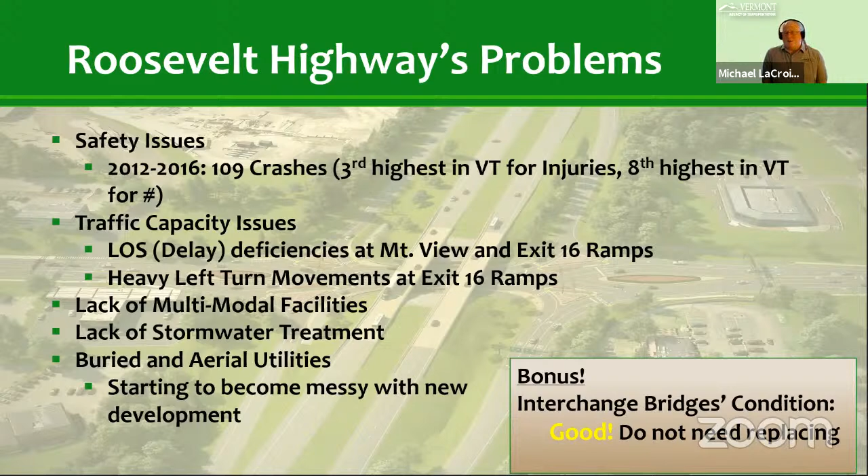Additionally, the corridor has no stormwater treatment facilities, and that's something the agency looks at when we're programming and improving new projects. And there's a significant amount of buried and aerial utilities up and down this corridor, primarily due to the growth of development in the Water Tower Hill area. One of the non-issues with the interchange at exit 16 is the fact that the interchange bridges are still in a relatively good condition, and that will factor into what we scoped to solve these issues in a moment. So really, we're going to address pretty much everything that I just spoke about.

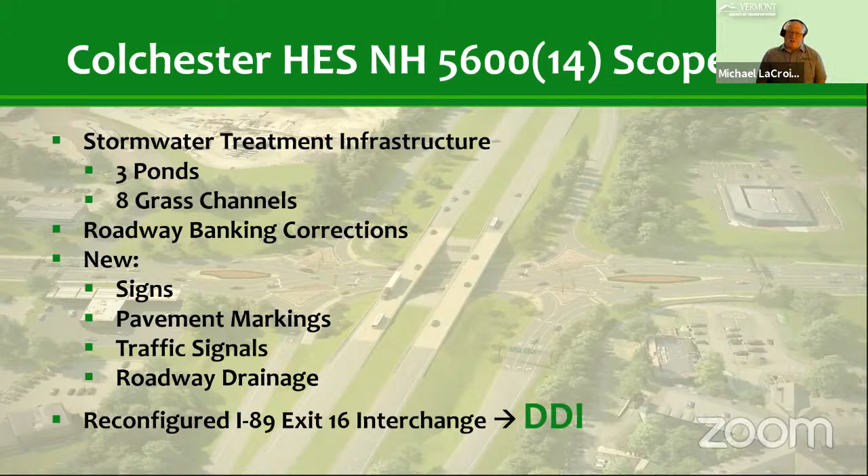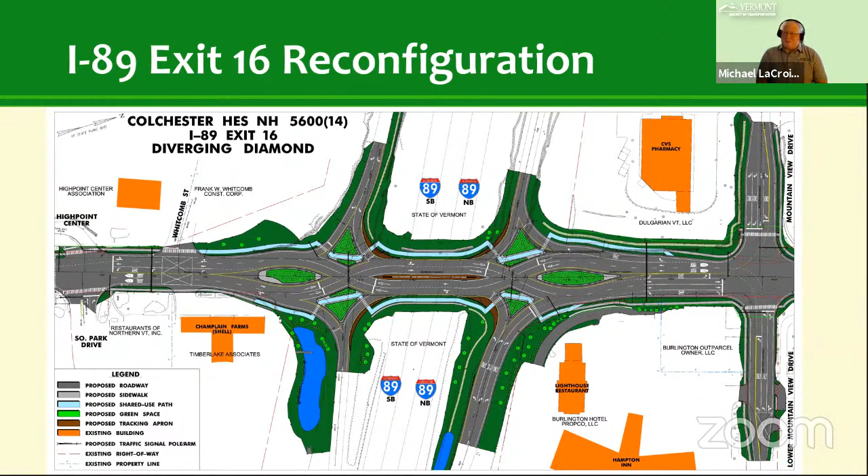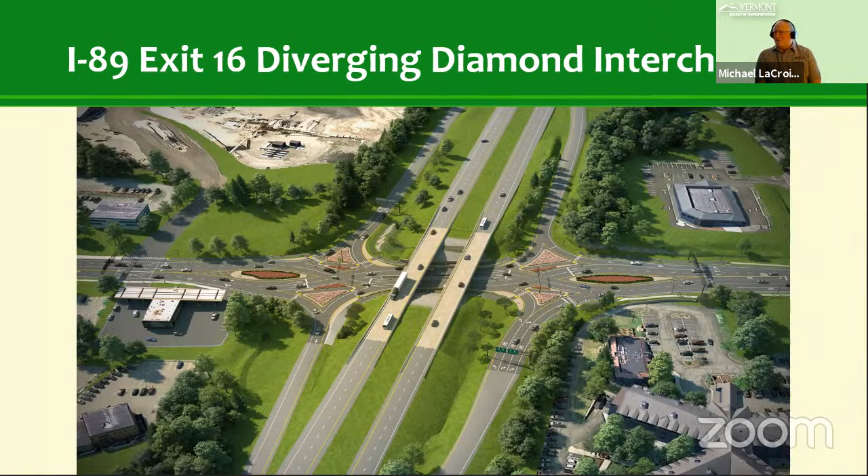So we're going to address stormwater. We're going to be correcting the roadway banking, new roadway infrastructure, signs, markings, signals, the whole 9 yards. But the heart of the project really is what's called the DDI, Diverging Diamond Interchange. For those who are not familiar with the DDI, this is what it looks like. It looks complicated, and I'll step you through how it operates in a moment. It really does not exaggerate the existing footprint terribly. So we're able to save a lot of the larger infrastructure, such as the bridges, while accommodating all the traffic that's out there and while improving the safety for all users. So this is what the Colchester DDI would look like rendered. This is an artist visualization of it, and I'll show a little bit more of this in a moment.

A case example I like to use is in Sarasota, Florida. They built one of theirs in 2018. It's a 5x5 DDI, which means it's 5 vehicular lanes in each direction. So it's a massive DDI. It's 70, 80,000 vehicles a day that go through this DDI. And just in the first year since they opened it, they were seeing a dramatic reduction of 50% in crashes, and they were showing a 40% reduction in commuter delay through it. And that's a 5x5 DDI. So these are extremely efficient and very effective.

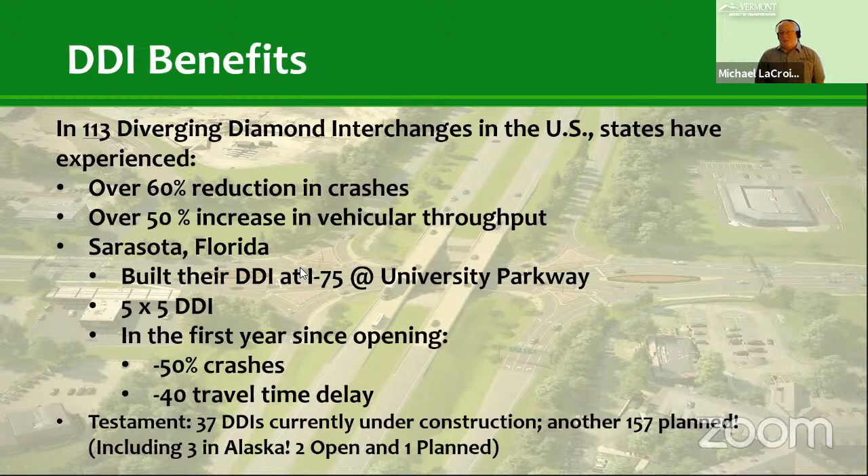I'm going to attempt to show you a little bit of a video of how traffic flows through a DDI, and I'll describe it as I play it. Let's see if it plays. Hopefully you're seeing some movement here.

What you're seeing is US Route 7, which is left and right. You'll see traffic moving left to right, south to north, crossing at the first signalized intersection where the southbound ramps occur, crossing over to the left side of the road. They travel underneath the interstate bridges on the left side until they come to the next signalized intersection at the northbound ramps, at which point they stop and allow the southbound traffic moving on Route 7.

Or they can just slide right onto the interstate without having to wait for a traffic signal. That's really the beauty of the DDI: vehicles can make left turn movements without waiting for a traffic signal. In the existing condition, the majority of the traffic congestion occurring out there is due to heavy left turning traffic. So if we can unsignalize those movements and get them moving through the interchange without waiting for a signal, the overall efficiency of the interchange will be enhanced.

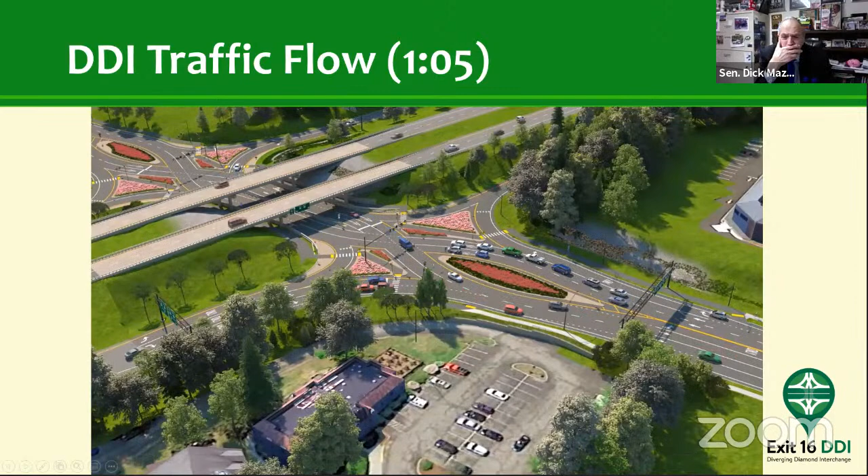Where's Costco? Senator Mazza, can I ask a question? Sure, go right ahead. Where's Costco? Can you put your arrow where Costco is? Costco is just below here at the very bottom. Okay, this is the Hampton Inn. Okay, so it would be down a little bit on your street. Yep, okay, thank you.

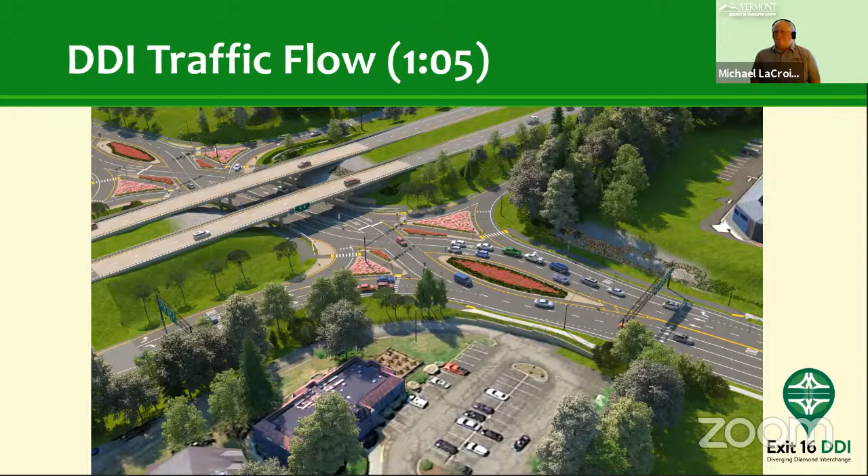Sure. And if that was still a little confusing, I'll show you a quick snip of what it would look like if you were driving through the DDI on Route 7, as if you're heading from Winooski to Costco.

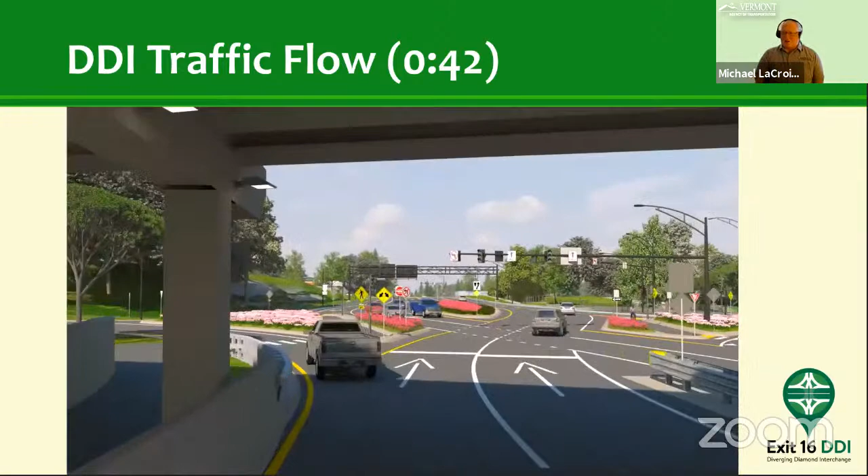So you would approach at a slow speed, and come to the first signalized intersection, and cross over. The markings and signs guide you through to make sure there's no confusion when crossing over to the left side and driving on the left side. Then you cross back to the right side of the road at the next green light. In this particular clip, if you wanted to go to Costco, you would take a right at this intersection, or if you wanted to go to Shaw's or Water Tower Hill, you would take a left. Or if you wanted to go to Senator Mazza's house, you could go straight ahead.

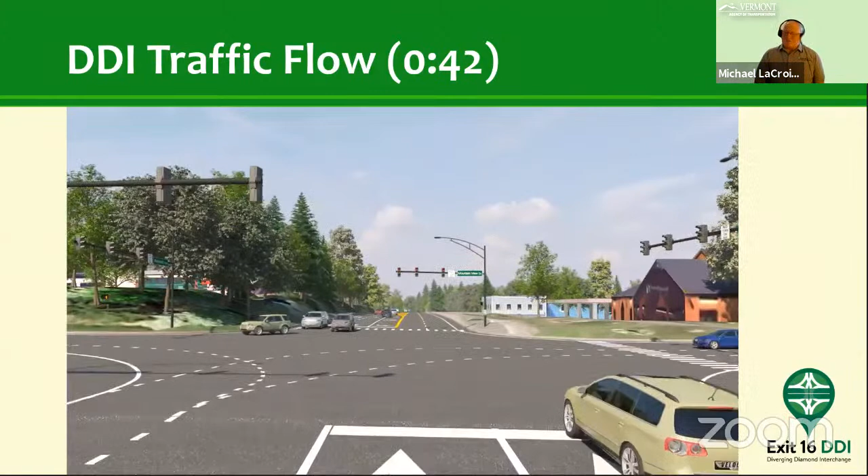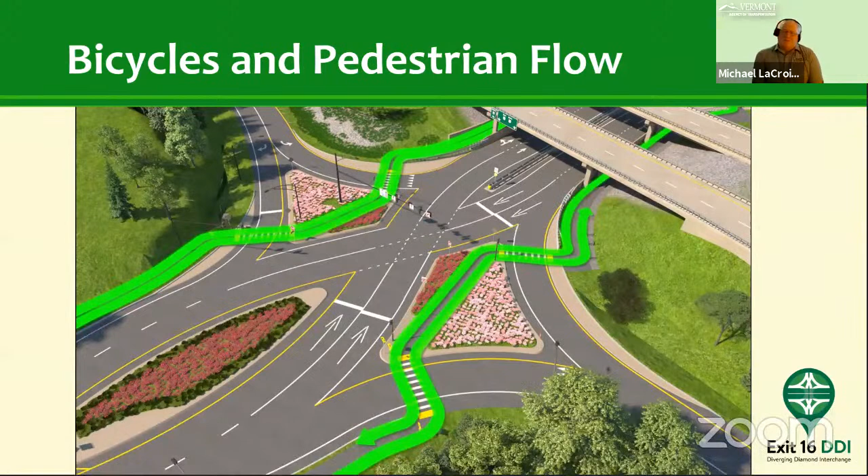With this project, we are also addressing the lack of multimodal facilities, accommodating bicyclists and pedestrians, which the current corridor does not do. The DDI will provide pedestrians with dedicated sidewalks and bike paths to negotiate the entire length of the interchange. Bicyclists will be able to use the bike paths if they're uncomfortable taking a lane in traffic. Leading into and out of the interchange, there will be paved shoulders for bicyclists, along with the green pavement markings you may have seen on the roads today.

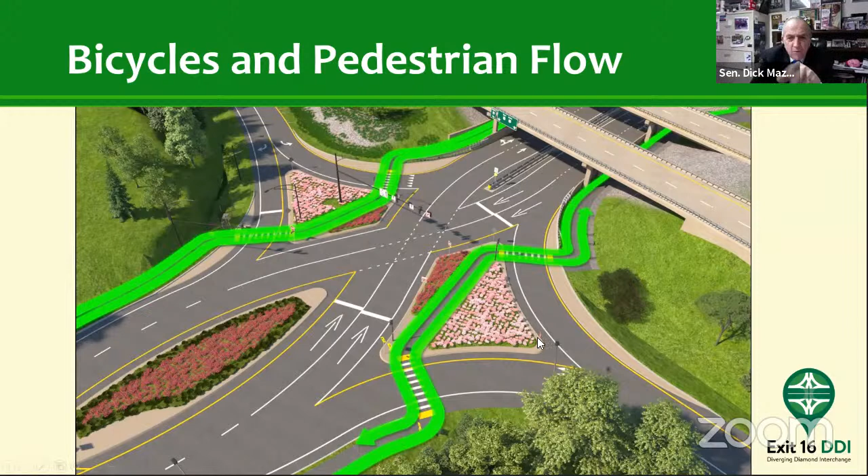Right now, if you walk on that bridge, you have to walk right in the highway, or underneath it you kind of have to hunch under to get around, or you actually take your life in your hands and walk in the roadway where there's hardly any shoulder at all. You can kind of see it in this photo, but we're going to carve out the space behind the existing bridge piers and put those bike paths in behind there. This will greatly improve conditions for those folks as well.

If I may add something - with Green Mountain Transit, there's been a lot of advocacy to get a bus route to the Shaw's up there, because it's the closest large grocery store for the town of Winooski, and you see people carrying bags of groceries, really in need of better pedestrian facilities. Yes, and as part of this project, we are going to be putting in a bus stop on the southwest corner of the Mountain View Drive intersection to help accommodate some of those folks that use that bus route.

You can bring them right to Senator Mazza's store too, if you want. Quite a ways away.

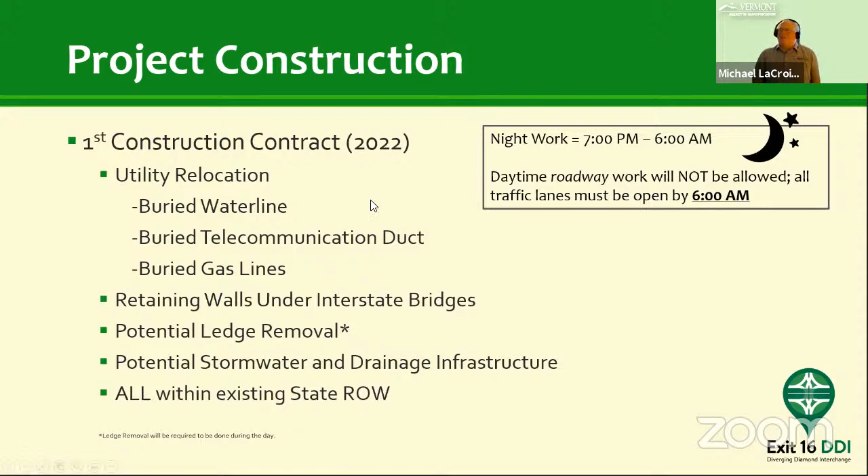So status-wise, the project is moving along, slow but steady, but we are getting there.

We've completed all of our project permitting. We've gotten our Act 250 permits, our stormwater permits, our wetland permits. All those are now officially in hand. They've all been challenged, and we have successfully defended them and obtained them.

The last critical piece to this before construction will be acquiring the necessary rights of way from the private property owners. We currently have 8 parcels. We've come to terms with almost all of the parcels except for 8, plus 2 lessees. We started off with 30 or 32 parcels, so we've made significant progress on that front.

Unfortunately, the owners of the 8 parcels still in question have challenged us, and we will need to go to civil court to condemn those parcels. That hearing is scheduled for this April, so that's coming up really shortly.

Once we have that necessity order in hand, we can condemn and pay fair market value for those parcels we're acquiring, and then we can move into construction contracting.

We're going to break out the construction into 2 phases, 2 contracts. The first contract would be primarily made up of utility work. We're going to probably build some retaining walls as well. That first contract we would like to construct in 2022.

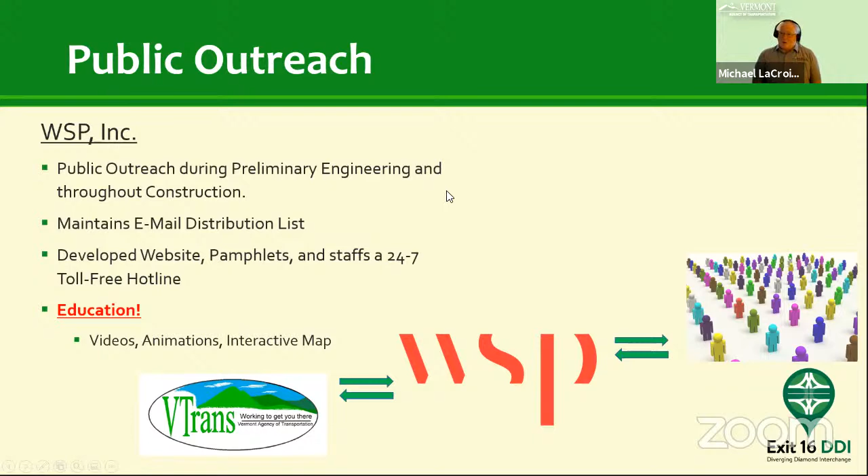I might add one thing. The reason this has been held up for so many years is not because of Costco, it's when Costco asked for gasoline pumps. Appeals started from one individual who was opposed to the gas pumps, and that's what started this many years of delays. It wasn't Costco in general, because the town had approved it. Everyone was satisfied with the Costco until the proposal of gasoline pumps, and that started the postponement for many years.

Thank you. Go ahead. May I ask a question, Senator Mazza? Go ahead. Two slides back, you used the term condemnation. I'm new to this arena—how is that different than eminent domain?

Well, condemnation, I'm not a right-of-way expert, I'll put that out front, but in my understanding it's a form of eminent domain. I think there's a lot of misconceptions as to what eminent domain really is, but it's defined in the United States Constitution under the 5th Amendment, I believe. As a public agency, we can essentially condemn, execute an eminent domain process in which we acquire those parcels for the public good in exchange for fair market value, financial compensation. So they're really sort of the same thing—condemnation is just a form of eminent domain, as far as I'm aware.

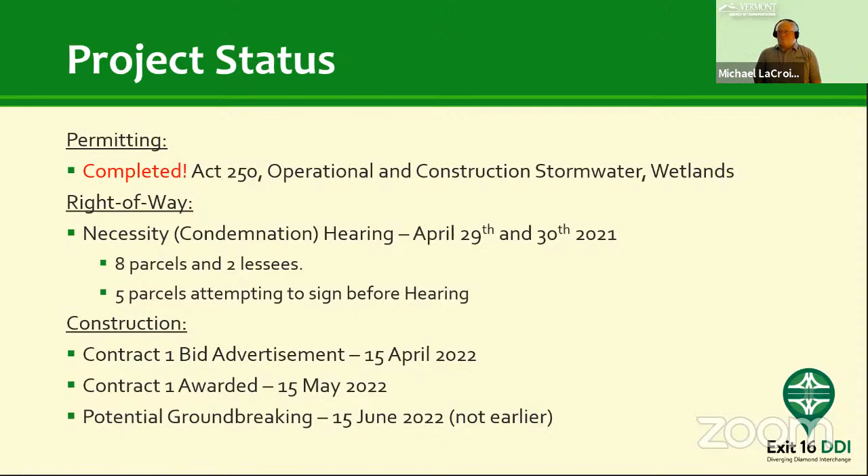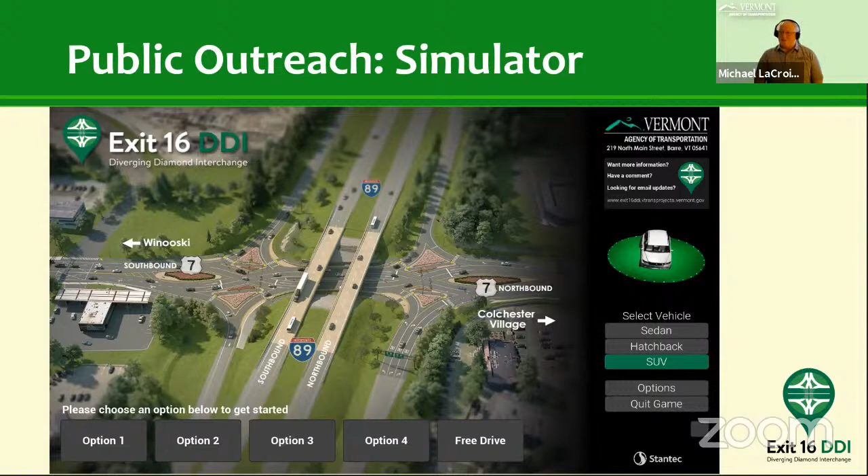It looks like a video game, and we've set it up so that folks can drive the new interchange in various directions. This is kind of what a screenshot of that would look like. It's fairly realistic - the video game makers actually took our construction 3D model and overlaid it into their video game engine to come up with this simulator.

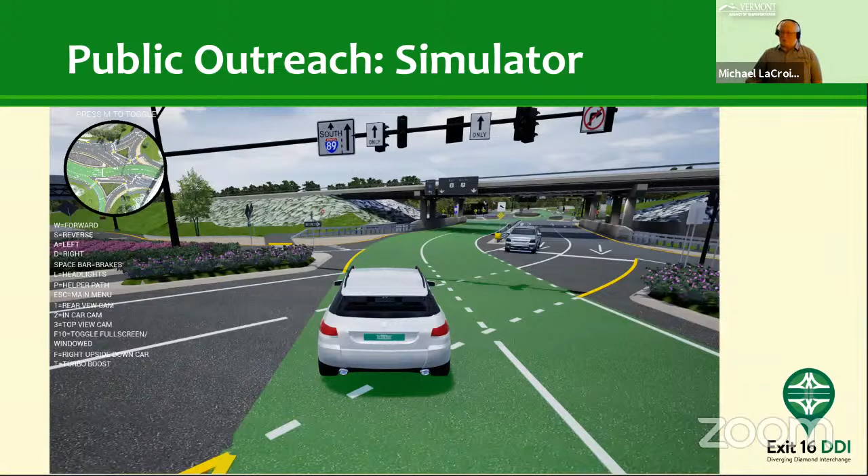The simulator is set up so that folks could drive it without having to worry about crashing or messing up, and that's what these green paths are made up for. It's really an education tool - we're just trying to show people how to navigate it.

Something we just started additionally for public outreach last week is a quarterly newsletter, so folks don't lose track of the project because, as Senator Mazza pointed out, it has taken us some time to get to this point. So we have consistent and timely outreach and engagement with the people, particularly during COVID, because we weren't able to set up our booth and simulator like we were hoping to over the last year and a half. This is just another form of outreach we're conducting.

And that's what I have for status at this point on the Exit 16 project. We still got a year or so to wait for anything to happen. Yes, it looks that way.

And like I said before, we won't need right-of-way certification for that first phase of work. So our hope is to have boots on the ground at the interchange in 1 year.

This is one of those issues where, I love Act 250, but boys, the appeals can go on forever and ever and ever. And the money that's spent is just unbelievable. There's just no end to it. The minute one appeal stops, there's another one, there's another one, there's another one. This interstate was never made for the traffic there is today, and it just has to be upgraded.